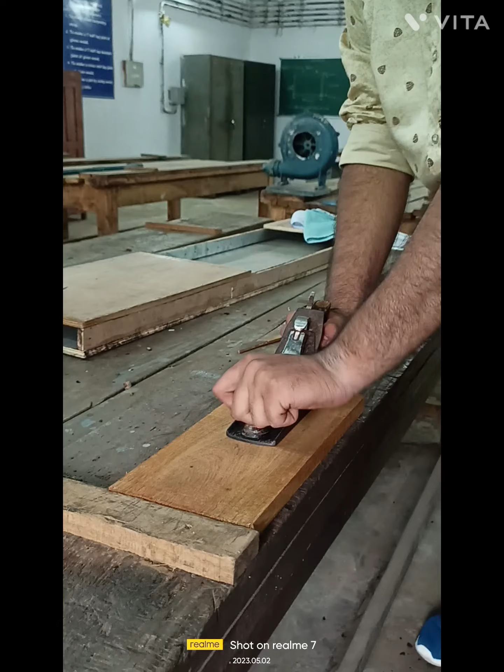Let's start the process. The first process of making our job is planing. For this, our right leg should be in backward direction and left leg forward. We will hold the handle of the iron smoothing plane in our left hand, and do a to and fro motion of this tool. Let's see how it works.

Now you can all see our first top surface is totally plane from all sides. Now we have to do the same process from the opposite side. Let's take the job, take the mallet, and hit it with the nail. Now taking the jack plane and planing the surface.

Now we check with the tri-square that our nameplate is exactly at a 90-degree angle or not. Let's see. Here the margin of error is very low, so we can consider it acceptable. Now from each side we will check that it has a 90-degree angle by tri-square or not.

Let's see the dimensioning process, then we will dimension it with the marking gauge. Now we can see that our top surface is also planed. After this planing, we have to do marking in it with the dimensions we are provided, to make the nameplate. Let's see the dimensions first, then we will mark it using the marking gauge and steel rule.

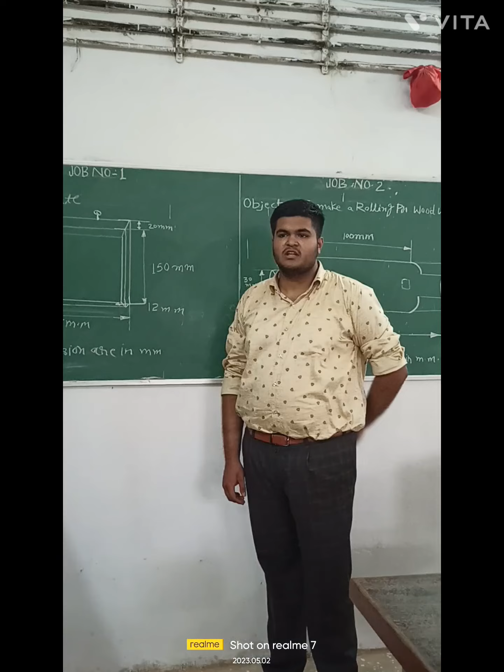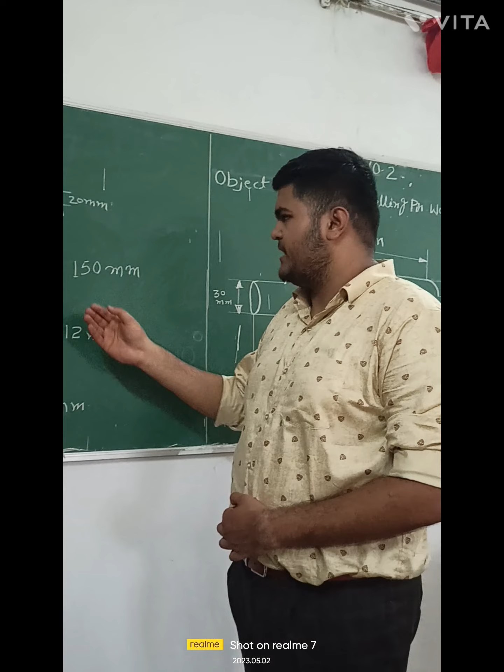For the dimension of our job nameplate, we should have a teak wood of size 375 mm length and 150 mm width. The depth of the block should be 20 mm, and then we will make a chamfer in it. Chamfer, in the sense, gives it a finishing and shows it in a good pattern, chamfering all the sides with 12 mm depth. I will show that in the job, how to make it.

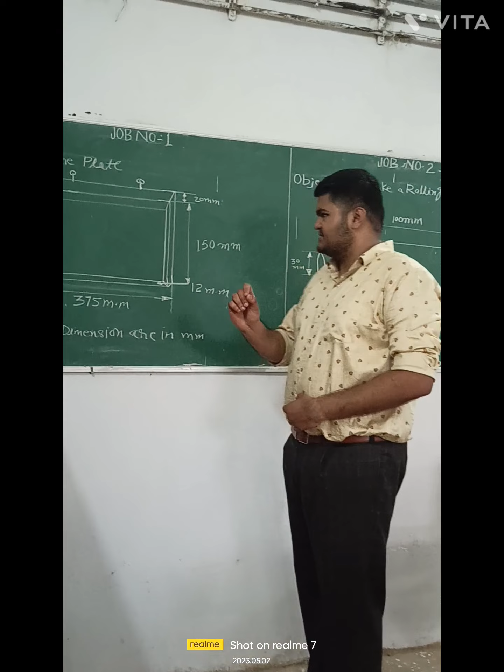By marking it we will make it. One more very important thing: we will do chamfer on only 3 sides. The 4th side we will not do. I will show why we will not do this. This is a very important thing.

Let's see, this is our workshop. Here is the fitting shop, here we have a lathe shop, then shaper machine. Here we have a welding shop, and this is the entry of our carpentry shop, with its nameplate.

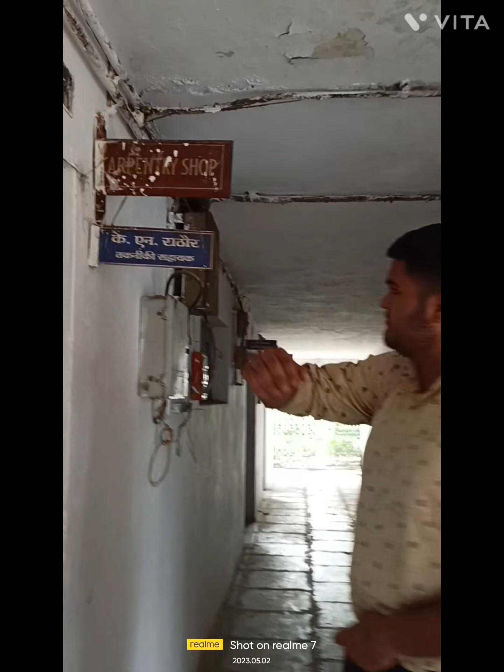Please come here. You can see that the chamfer is done on three sides - this side and this side. This side we will not chamfer because this is the holding position of the nameplate job, and we will mark it from all three sides.

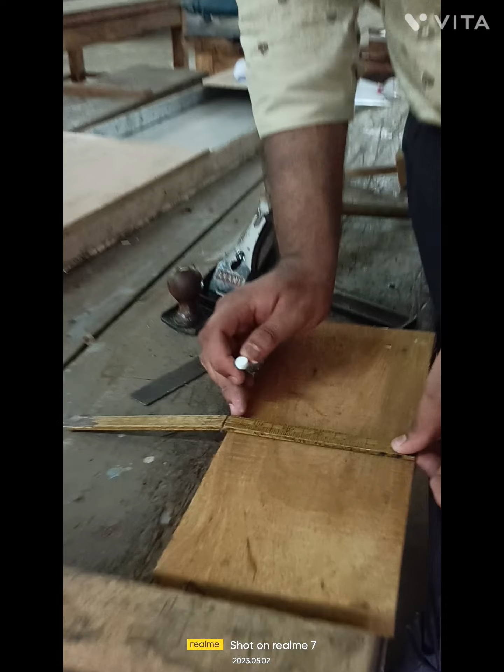First let us check the length of the job, whether it is exactly as per the dimensions or not. It should be 15cm, and it is coming exactly 14.5 or something, so it is close to our dimensions. The width we have provided is 20mm, 2 centimeters, but here it is more, it is 22. It is considered okay.

Here you can see this is a marking gauge. Let me show you. In this marking gauge, here we have measurements in inches.

We are supposed to do chamfering from a depth of 12mm, but here it is not possible since we have 22mm. So let's divide it - if we keep 4 in the head, it comes to 18, so 9mm I can chamfer from both sides. We will do 9mm from here depth and 9mm from here depth.

So first, before marking, let's plane the edges with the help of sandpaper so that marking will be easy for us.

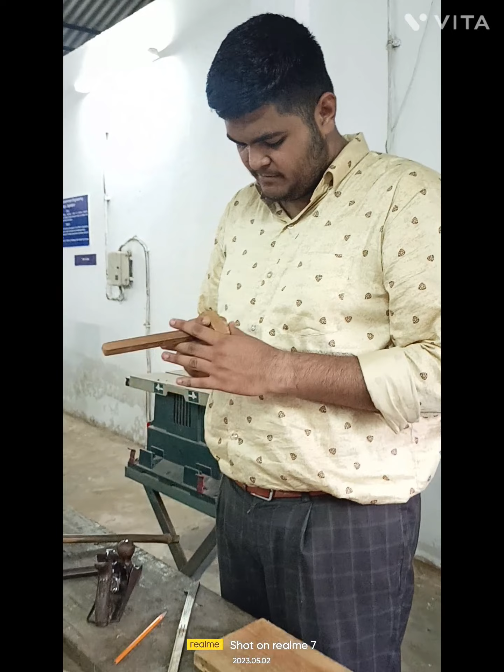Okay, so the markings are marked. Now with the help of the marking gauge, we will see the points - it is coming exactly here.

Now see, exactly we have marked the point. From here we will do the chamfer, and the third side we will do the same. Here we have marked, here we have marked, and same here.

We have to do this process very gently, because if we do it hard, the marking will be deflected. So here you can see a straight line is made. Same process being done here.

So now in our job we have done the planing process and the marking process. Now we will do the corner planing process of making the chamfer in the nameplate.

So for making the chamfer in the plate, first we have to take the iron smoothing plane, then take a left leg in front side and back left side, right leg. Now hold the job like this in the support, then make it at an angle of 45 degrees.

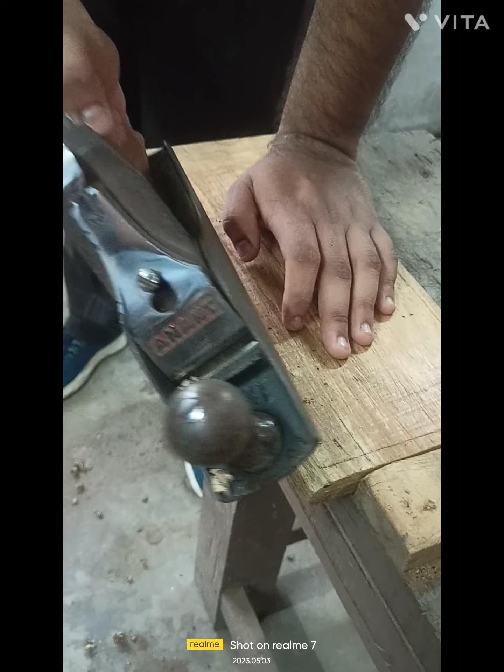Also, while doing this process we have to take care that some portion of our job should be outside of the working bench. So for this we have to do it like this. Now the other side.

So as you can see, one side of our chamfering is done on both sides of the nameplate. A triangular portion is visible here, same as from the other side. We have a flat head of 4 mm at the top of our chamfered area. This process we will repeat on this side and this side too, all 3 sides we will do.

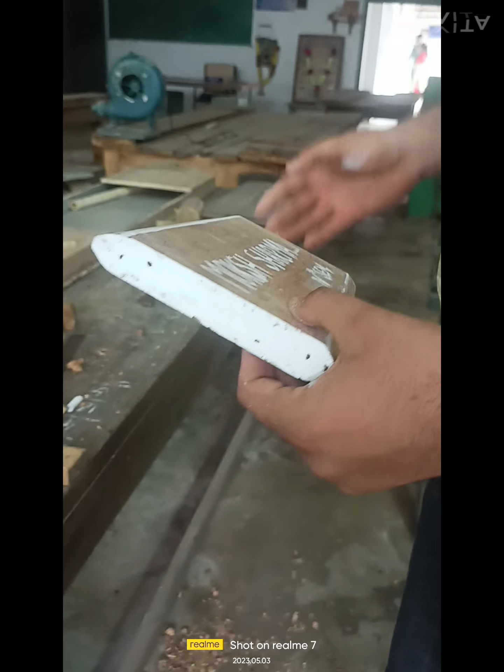At last you can see that our nameplate is ready. So this is the chamfered surface, this is the surface we will hinge, as I shown in our carpentry shop. It is hinged from this side, and here it is written carpentry and shop. So as per your requirement, you can write anything. So it is a nameplate. I will make this, I have written my name and my semester.